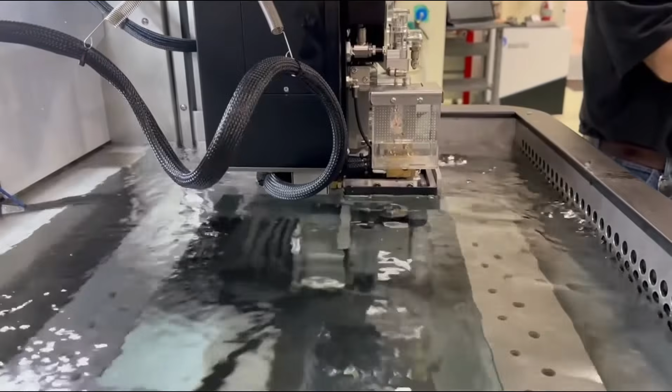In this video, we're going to be talking about VISI Wire. And with collaboration with our partners at Makino, we were able to make this video. So for that, we thank them.

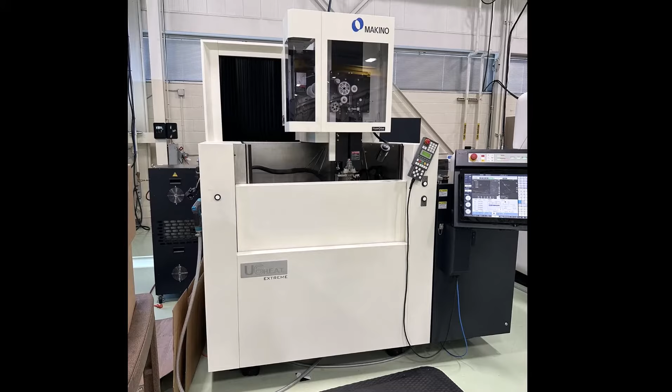As you'll see later in this video, there are many different wire EDM machines, as well as sinker and CNC machines offered by Makino. So let's start off with our VISI Wire, and we're going to be creating features first. There's multiple different ways to create features. The first way we're going to show is a manual-based feature. So we're going to create this as a standard feature here. Pick our profile.

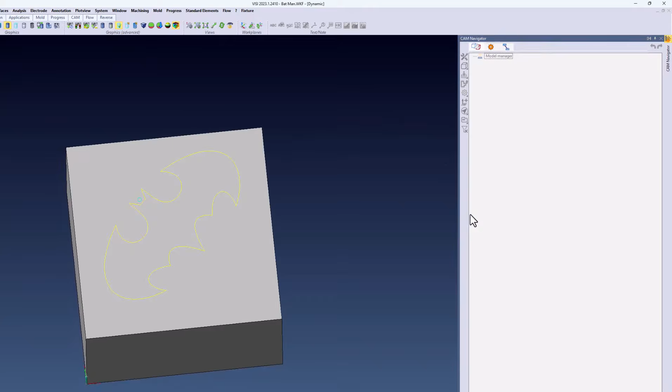And then inside of this dialog, we can choose whether this is going to be a pocket type of feature or a boss to determine which side the wire is going to cut on. So as you can see, we can extrude this down to the proper height it needs to be, and there's our feature.

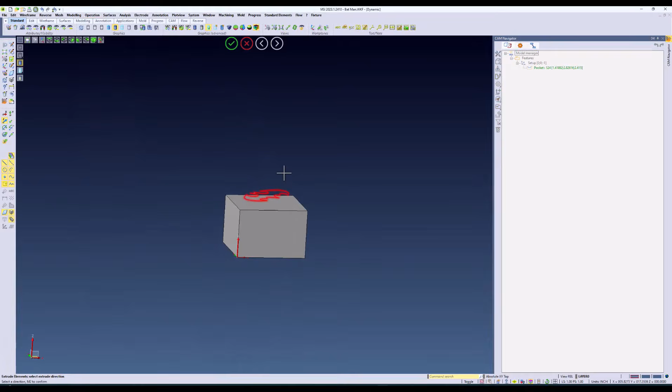So a second way of being able to do this is by actually letting the system scan for it. So I'm going to use some simple modeling commands to be able to actually extrude that into our part. So it actually shows the actual part being cavitied out. So from here, instead of a manual feature, we're going to let the system scan for that feature itself using recognition. So with this, you can see how there's now a new pocket.

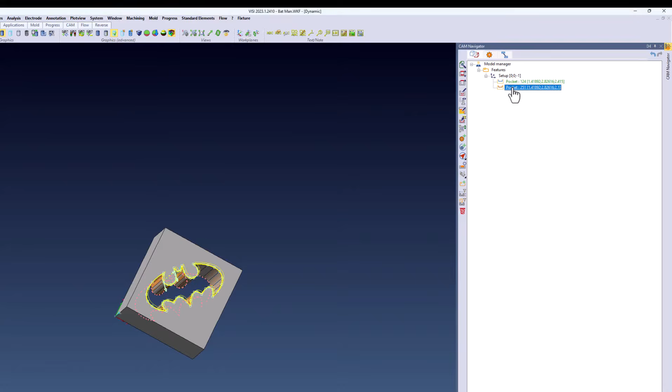From here, we're going to go ahead and add a wire operation. When we add a wire operation, we can select Add Operation and choose the operation itself. When we choose it, there are some very important things to choose. As you can see, there are several types of manufacturers, which in this case, we'll choose Makino. Inside of here, we choose the type of material, and then we choose the wire thickness. These are going to be important later when it comes to selecting technologies to be able to put in the correct electric levels and offsets for the machine.

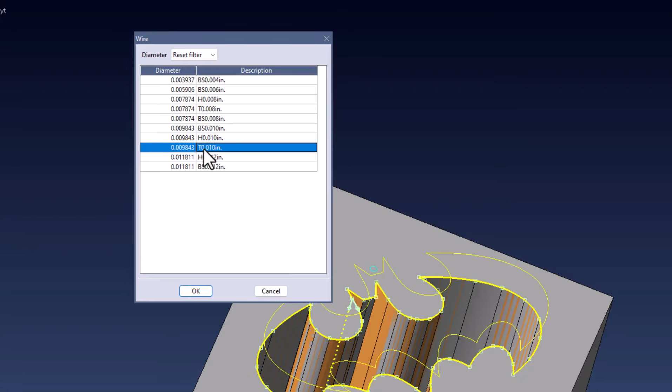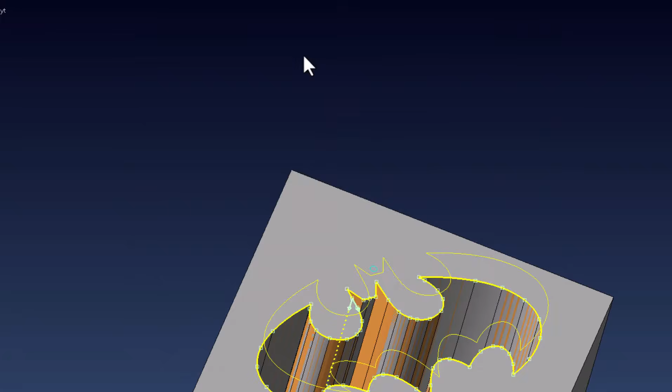So just to look at this, if you look at Makino specifically, you can see how there's hundreds of machines in here for different models, different versions, and it offers all kinds of different technology based on the machine that you select. So within here, let's start talking about our actual operation menus. So you can choose within the cut methods whether you're doing clockwise, counterclockwise. You can choose the technology based on what we selected earlier, and it populates those electric values. You can see the generator values that the machine reads. It gives you all kinds of different information.

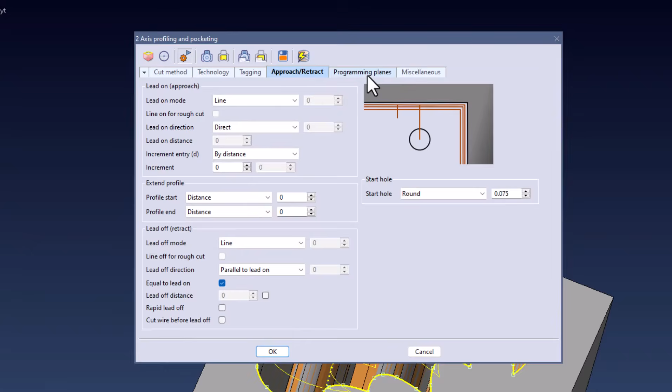If we did a 3-cut pass here, we could determine our tags. So what's our tag distance? When is it actually going to leave the tag in there? That's what this menu does. And you can choose the distance the wire is going to lead on and lead off. Within programming planes, you could determine how high your nozzle is above and below the part. And under miscellaneous, you can add custom code.

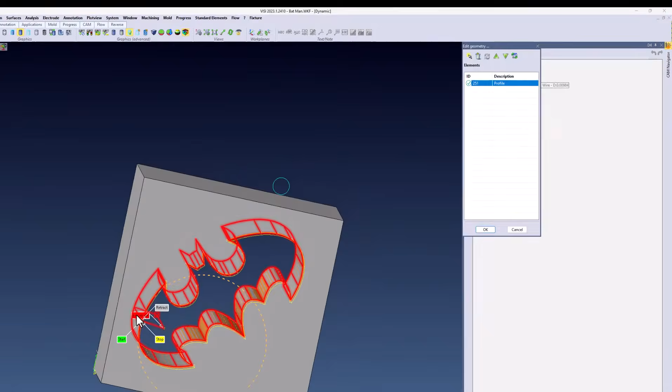So within our next dialog, we're going to change our approach point to that circle that I have at the top part of the screen. If we go into here, we could right click and say Edit Geometry. Within Edit Geometry, we could change our approach, which automatically shifts your start, retract, and stop values to that area. So if I go ahead and build, it's going to change the start, approach, and retract points to that specific point area right there.

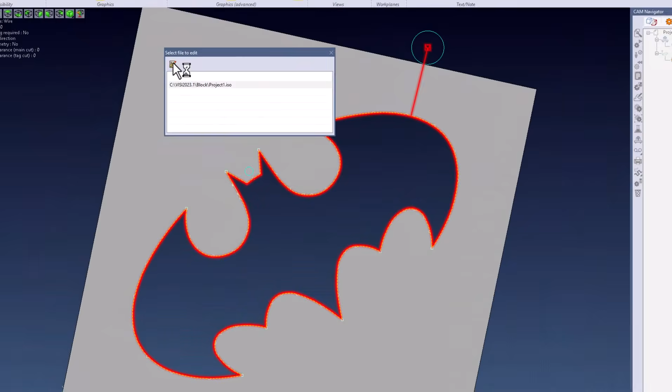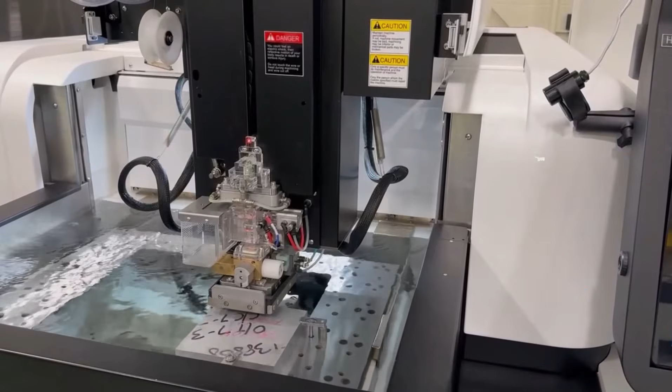So with that, we can then post out the program. So it's very easy to post out a program within VISI, and you can sample the code that's actually going to be showing up at the machine. So as you can see, here's the same exact posted code at the Makino Wire EDM machine. So now we're going to start running the program from that. You can see how the actual machine interacts with the posted code from VISI, and you can see how it starts cutting the part.

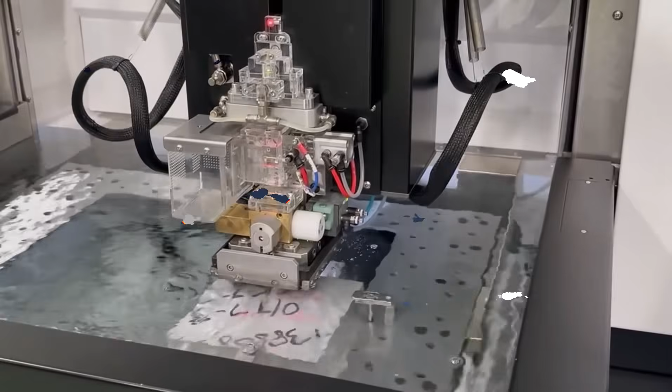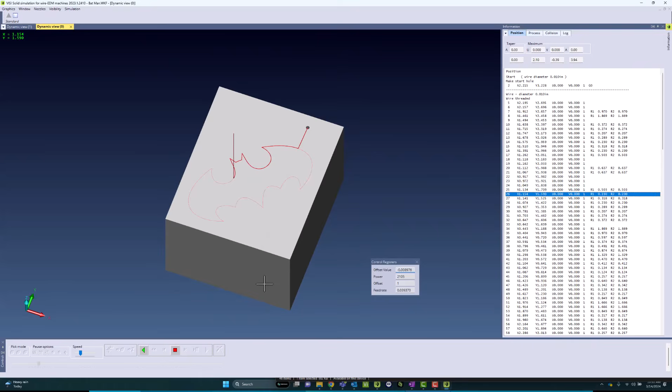Before the cutting process, we can also run a simulation through kinematics. If I hit OK, you can actually see what the wire burning is actually going to look like. So you can simulate the actual wire process. So as you can see, it's showing you the actual XY movements on the right, and it's showing the wire process. If you look at the controller, which we're going to show here in just a second, you can see the same exact process that's going on.

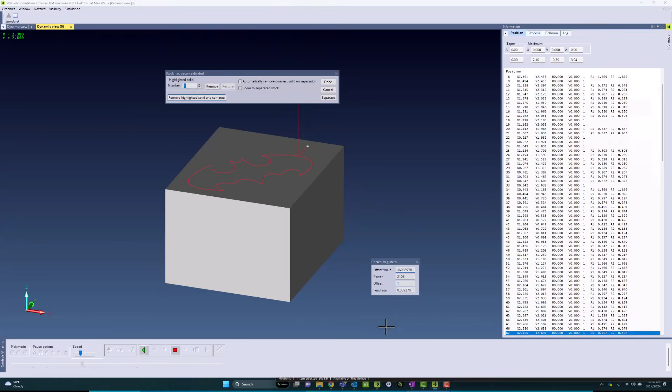So this is actually while the program is running. This is the process of where it's at in this current step. And you can see on the machine where it's actually running. So kind of finishing up the simulation, you can see exactly what is going to happen at the machine. We remove that slug out, and you can see the slug actually taken out.